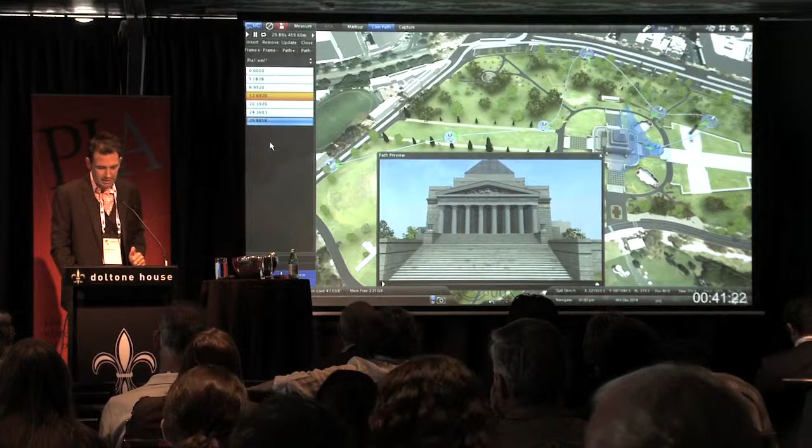We're really about trying to improve efficiency, okay? And we're about improving the outcomes and effectiveness. The effectiveness of you guys who are in the built environment who need to get to the negotiating table. I find the negotiating table is the place to be effective, yeah? You want to be there when people are having discussions.

So my view, I'm going to put forward that planners, and the reason I went to be a planner is because you're both visionaries, setting up the skeletal framework of the future, and you're also the facilitators and the mediators and the arbitrators between all the elements, right? And there's the physical, there's the functional, there's the interpersonal, and the stakeholder roles. You guys and me have the opportunity to sit there in the space between the spaces.

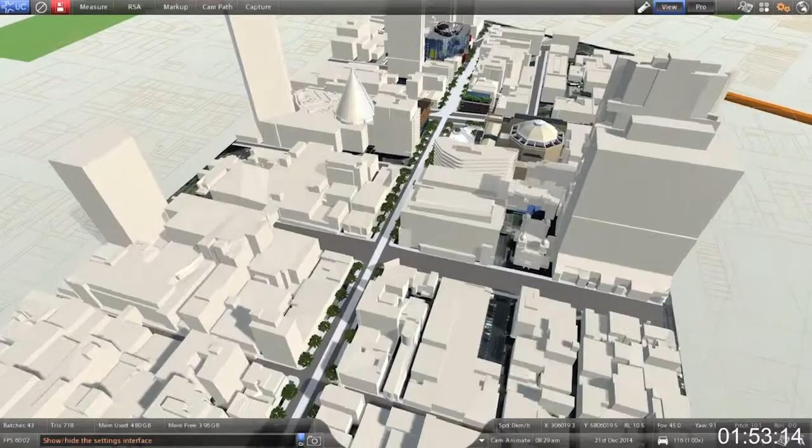Yeah, we've got engineers, we've got architects, they've all got their very specialist technical areas, but then there's how these things join up. It's how the vertical meets the horizontal, for example. It's how a road hits a terrain. It's how a train station hits the tram station or the bus station or the street. That space there is where the magic can happen. And it's a nice space for us to be able to grab and play with and run with and have a big influence and effect.

Now planners, in the nice way, have typically the tools of the zone and the code and the regulation, right? We need tools, and the reason I've gone out now and spent 10 years and bet the family farm is I needed a tool that allowed me to get down to the human scale, as you saw there. So this is just a video. You can actually see our toolbar around the edge of some of the work we've done in Melbourne.

These particular bits were actually paid for by the Melbourne Metro, and we're working between the Metro, the state planning agency, big road projects, and they're all using the same tool to talk to each other, and it is having a big transformative effect. So this tool, we need it to be integrated, we need it to be multidisciplinary, right? We need the engineers and the architects and the urban designers and the landscape architects talking to each other.

It needs to be agile, and it needs to be live. Okay, and the magic number here is on the bottom left, it says 60 FPS. So that's twice the rate that your TV runs at. So it's frames per second. So it can drive at the speed of conversation. You guys can have a conversation, and I'm going to reveal some tools today in this space. It needs to be intelligent and it needs to be measurable.

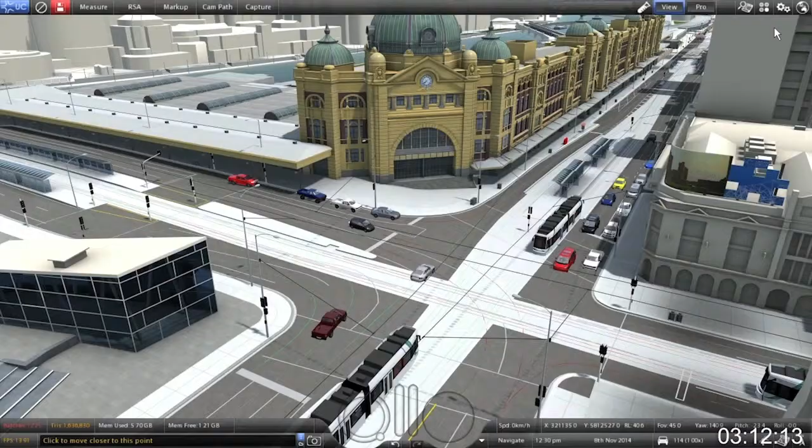Okay, so look, I'm a public space advocate, right? That's what I really love. And the thing that affects public space more than anything is transport. The transport guys, they've got all the money, they've got the big influence, they do the big projects. So I need to get to the table with the transport guys. So we've built tools here, and here we are dealing around Flinders Street Station. It just happens to be an intersection that we had.

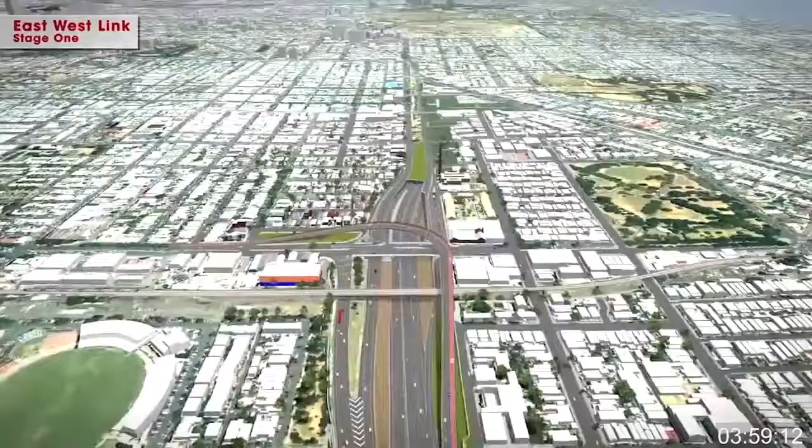That get you in and experience and influence that space live and in real time. And this one trick of I'm clicking on a car here and I'm now inside some sort of accurate engineering space, and I can click on the rear view mirror, which is important from a driver tester point of view, and particularly as the user experience from the steering wheel, and it would be great if it was push bikes. We do push bikes as well, you'll see in a minute, is really transforming projects just like this. This is a $10 billion road project on the edge of Melbourne.

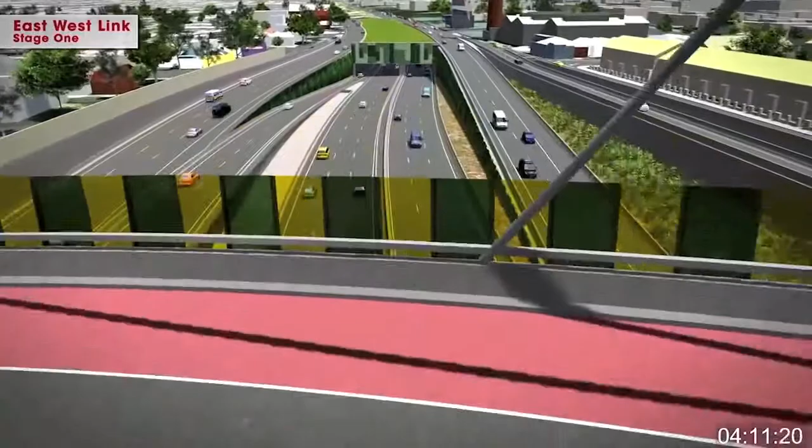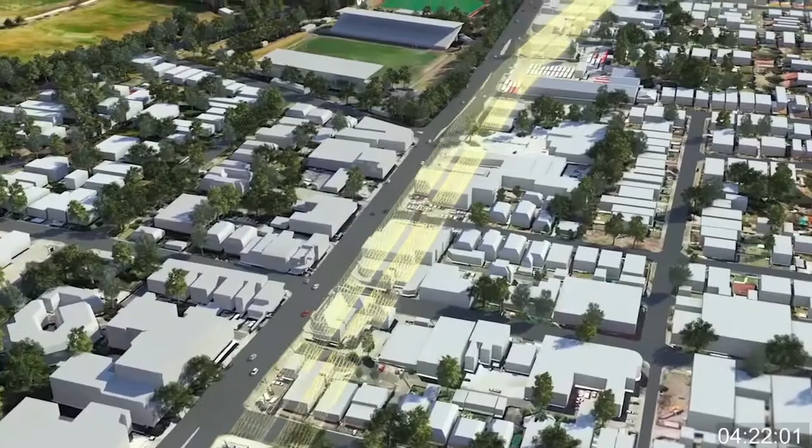And what we've been able to do is bring together all these elements, whether you believe in the project or not. It's about how it interfaces with the edges, yeah? It's how it integrates with the community. Can it benefit? Can it actually drive quality like CityLink and things like that with the fantastic landmarks? They do roads very well.

Sometimes people like to take it to this pre-rendered space. So this is East West Link, and we're sort of doing Disney, Pixar kind of tricks here and visual effects and tunnels underground and stuff like that, sort of into the promotional land. We don't do too much in the promotional kind of space, but here we are trying to sell the idea and tell the story really of, this tunnel sort of down there, so don't worry. And here's the urban renewal. But the space that we really made a big effect there was actually in demonstrating some of the earlier options and perhaps how they weren't the best thing for the actual community.

A lot of work we do is quite humble, it's quite underwhelming, it's quite sort of minimalist. So here's a bike path, actually next to the Foxground to Berry bypass, which is down south in New South Wales. Stage 1, 400 submissions and a bit of an agitated kind of community and a bit of negative media, and things didn't quite work out.

Stage 2, using the interactive media, of which this is just a video out of it, all built in virtual space. We also picked up a whole lot of traffic engineering problems, but really it was around, hey, we've got this really nice escarpment here. We want to see this escarpment, which you can see coming around the left. We haven't really resolved all the design yet. That's okay. We can go in and we can be in your front yard and we can have that conversation. They got 4 submissions. And those submissions were intelligent, informed, useful submissions as compared to people reading engineering plans and getting it off track. So that's number 1, being able to keep up with the conversation and build that stuff.

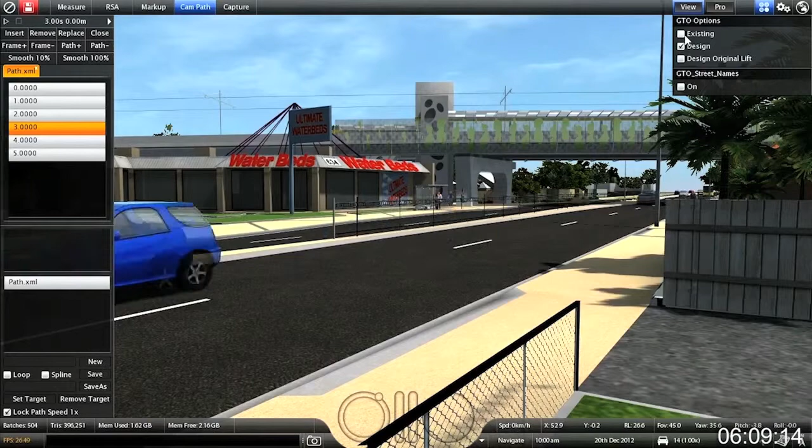Number 2 is optioneering. So we've done this for about $50 billion worth of infrastructure now, simply being able to go anywhere in space and flick between options. Here it is before, here it is after, and that grade separation. Here it is bridge 1, bridge 2, bridge 3. Here it is, you live here and you're about to have this thing come closer to your house. How do we have that conversation to improve that design outcome? So the interface there around the design aspect and bringing the community, the stakeholders.

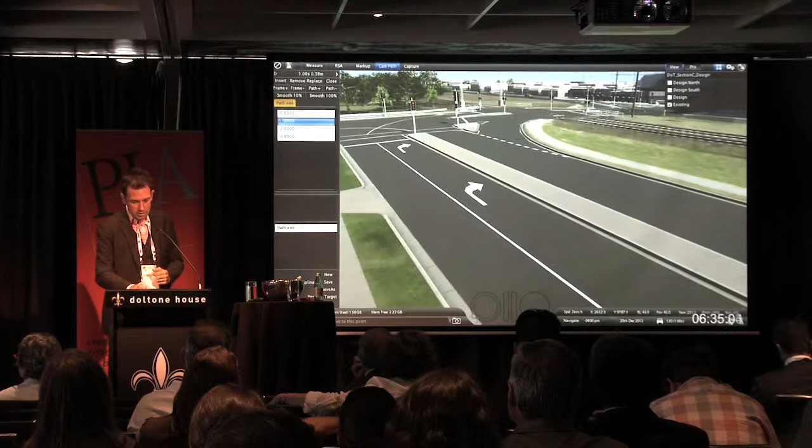Here's another one in Melbourne for regional rail link. And with the realness and the site rawness, it's honest, it's measurable. If you ever doubt it, you can go in and check out your relative levels and you can measure things. And that really allows the conversation to propel forward inside this transport space.

This is from South Australia. This is the Superway, which our claim to fame here was to be able to get this concept, which has sat for 2 or 3 years in engineering land spending millions and millions of dollars, build up the concept, and people were really worried about an 11-metre structure over their properties, and fair enough. And we could get that $800 million funded from Infrastructure Australia and then allow the conversation to occur and come up with the best solution possible.

But that's still not enough for me, okay? And working with people like Adrian, and Adrian in particular, into our next stage, we want to be faster and we want to be further at the front of the conversation, okay? So here we are taking engineering drawings and architectural drawings and putting them in place. Now what we want to do here is we've got to have this base model.

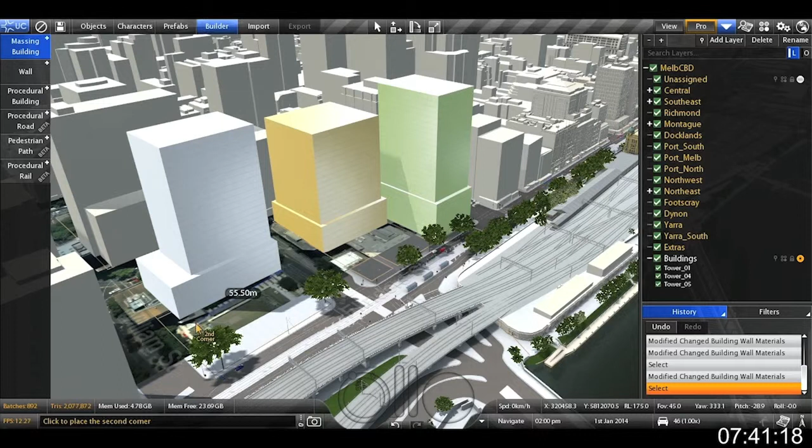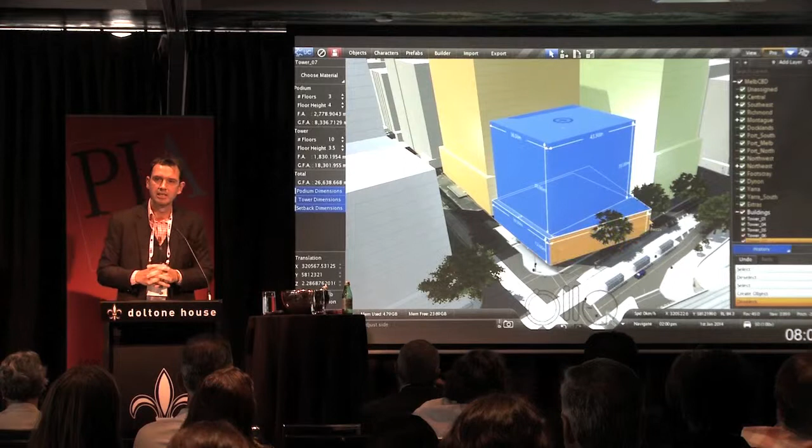So here's Melbourne, sort of patched together from a few places, and we want to be able to have a conversation about a podium and tower in this particular case. On the left of the screen it's got the floor area, the floor-to-floor heights, the setback, and you can literally sit there and have that conversation - I'll do one here in 15 seconds, but it could be 5 minutes, half an hour, an hour - really analyse what you can do here, what you should do, and its impacts on the space around you.

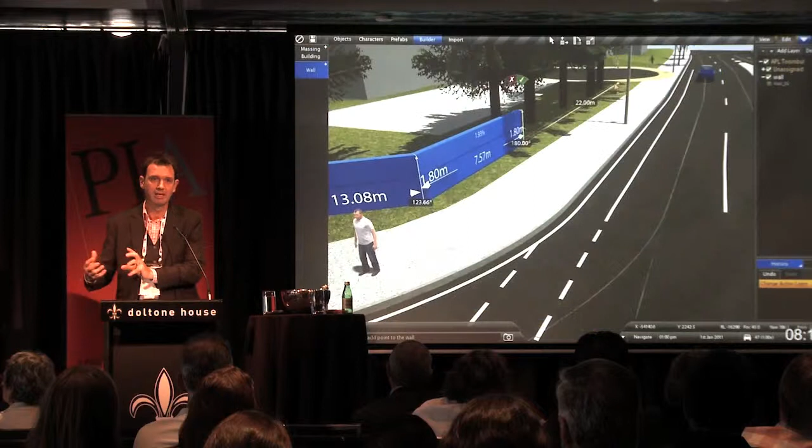This perhaps could have been months and months of conversation, with all these pretty architectural drawings, and now you're literally sitting there saying, well, do we just like this form and does it work? Same with walls - we do that in sort of constrained environments around railway lines and things.

Into a more complex building form now. I went into planning to be able to sculpt space at this kind of level - big boxes, shapes - but then get down to the human scale and be the woman or the child or the man in the street experiencing this kind of space.

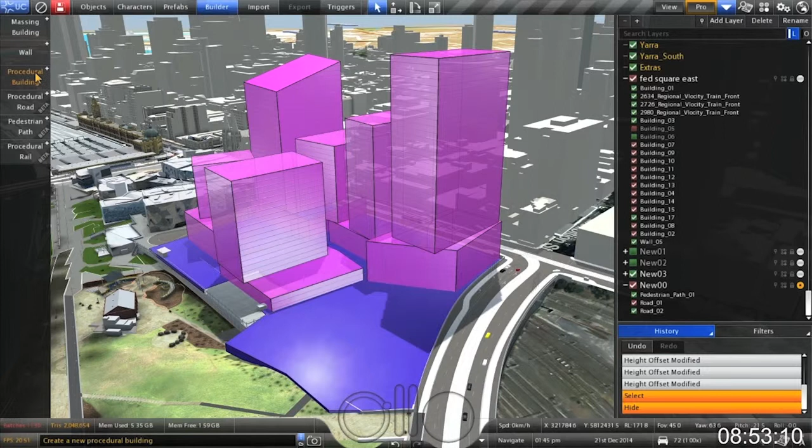So this is Fed Square East. This is not a proposal, by the way - I'm just absolutely messing around there at Fed Square East, so don't get the wrong idea. Confidentiality, of course, is all very important in this space.

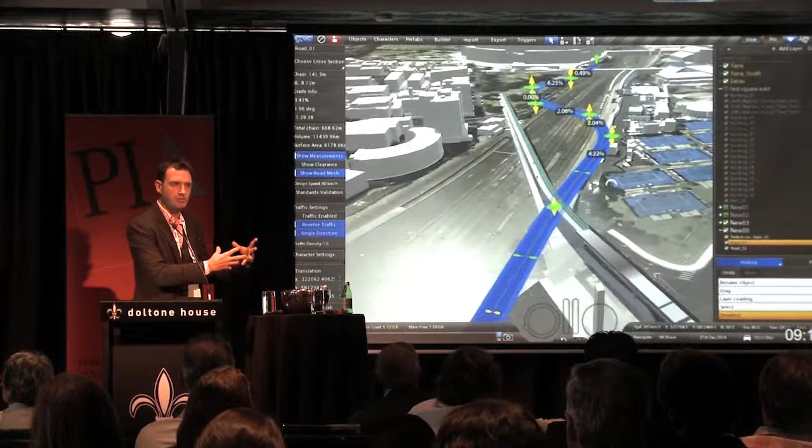So now we wanted to influence the engineers too. Planners are great people, engineers are great people too, but we want to get into that space where these alignments have these massive effects on our urban form, like a road alignment. We don't do like that railway line we saw in Tokyo, sadly, where we tend to grade separate everything and have big safety zones and big fences around things.

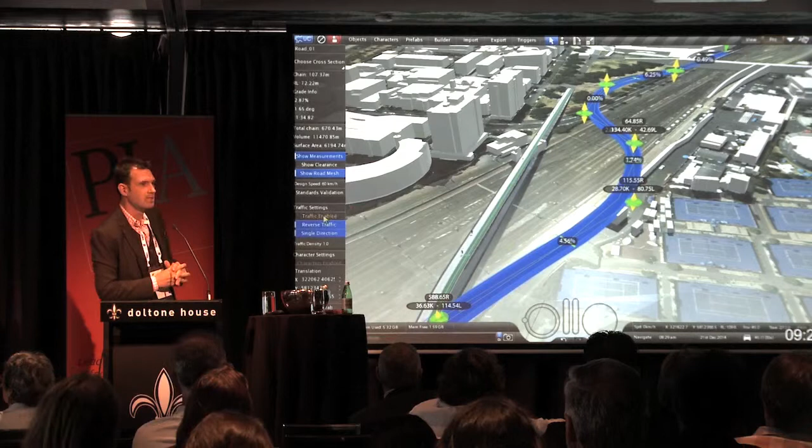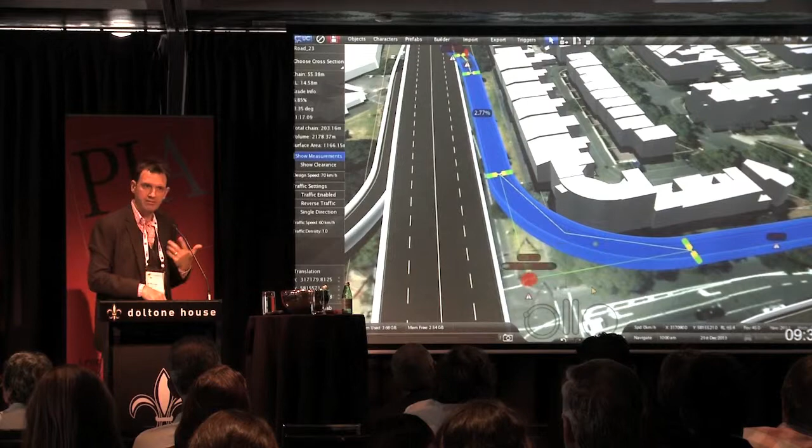So we've gone in and actually analysed the national standards in road design, called Austroads, and said, how do we allow people to make a road and test its compliance for vertical curve, horizontal curve, gradients, superelevation - there's a whole range of factors in there - sort of rubber band simple. We're talking about the technology of the future, super easy.

This is exactly what we're doing here. Red basically means bad, as per usual - red is a non-compliant space. And we're putting this tool inside the conversation that is happening between stakeholders right up front.

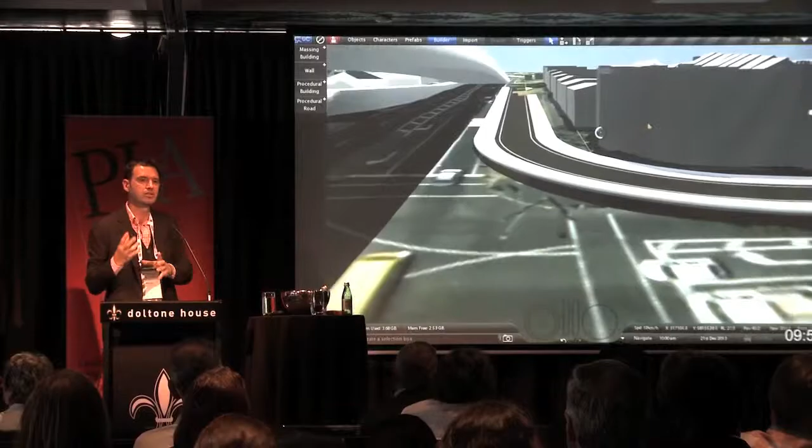Okay, so here we've got place A, where we've got the buildings more or less there with the aerial photography, and then we're going in and smashing that stuff in live in a meeting. That would have been years of conversation and millions of dollars.

Now I'm messing around here. I'm also building a railway line through somewhere in Melbourne, which will remain unnamed, but it's really just to prove that again we can get a light rail concept up and happening in a matter of seconds, a matter of minutes.

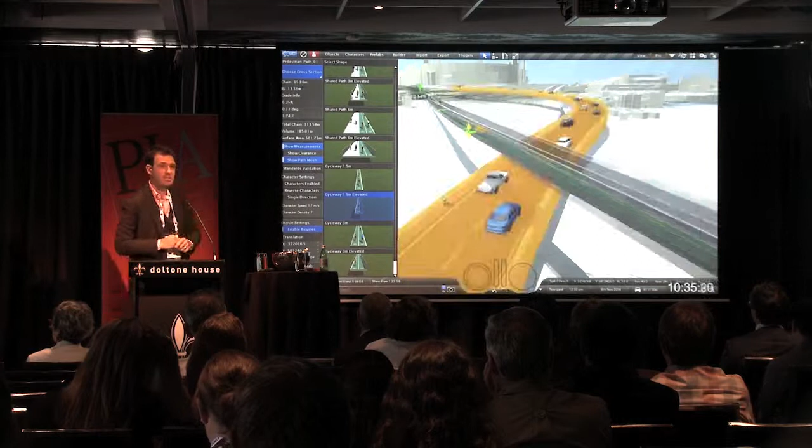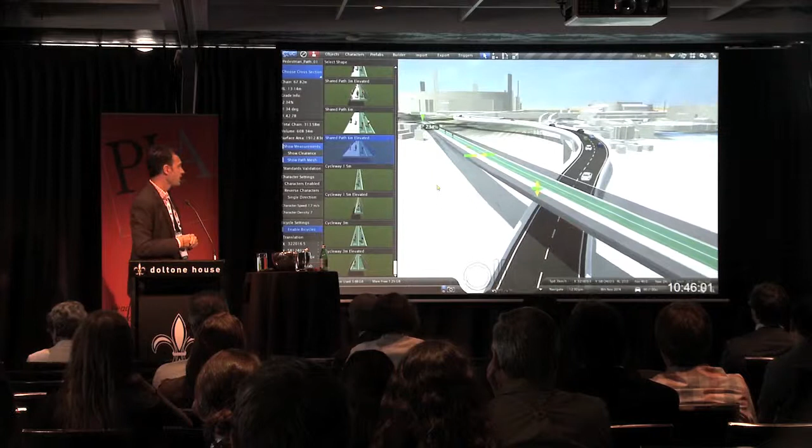Same here, same idea, using these Austroads standards into paths, so you can select different sections - push bikes, pedestrians, all that kind of stuff. Bring that conversation to the front, and of course it's circular, as all design is.

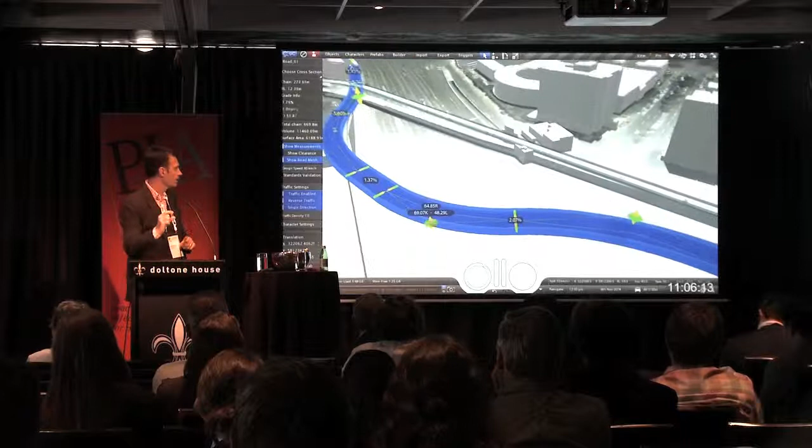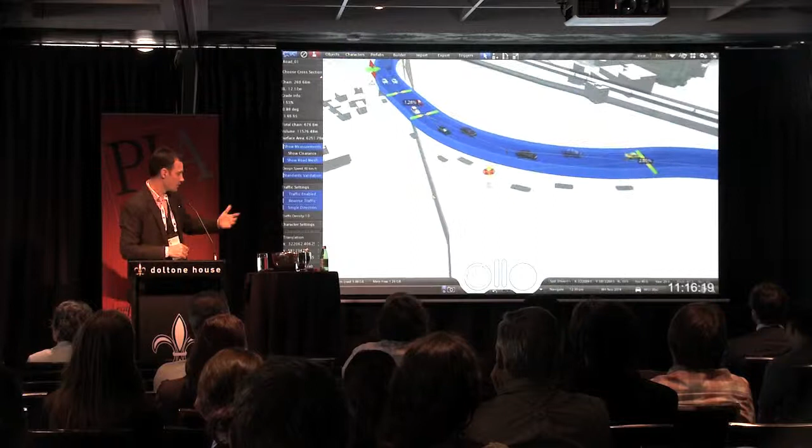It goes back to everything has to be verified by the technical experts, of course, but getting you down there in that push bike space, for example here - and they are commuter type push bikes, sorry there Bob, in their Lycra - it gets you the idea of what is this place actually like as a human being, on the fly. I'll select this road and it will tell me a few things that are wrong with it - in this particular case I've got the horizontal radius error at the design speed. In the engineering space, design speed tends to drive the functionality.

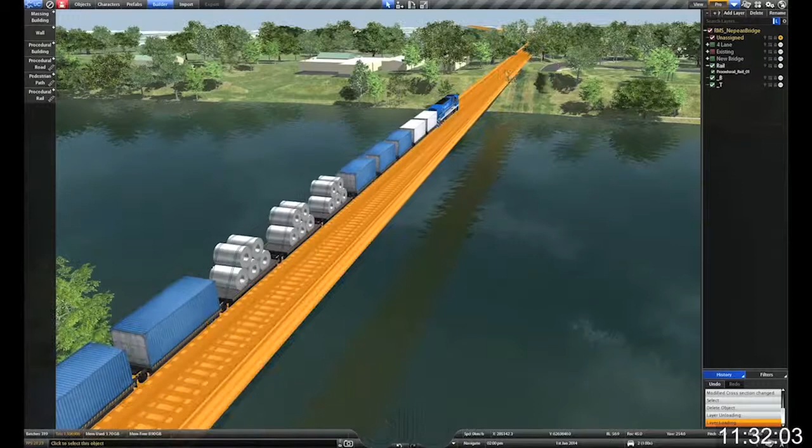So a lot of our clients are getting it, and you'll see Adrian presenting that up. Then in the transport space, which is mainly where we work, we're able to offer - and once people go through this process once or twice with clients - they're like, wow, this is really changing the conversation here, this is really mixing up the situation.

So we're now looking at - you guys probably know the charrette and the inquiry by design process and stuff like that. It's good, but it can be kind of expensive, and you come out with all these 2D drawings.

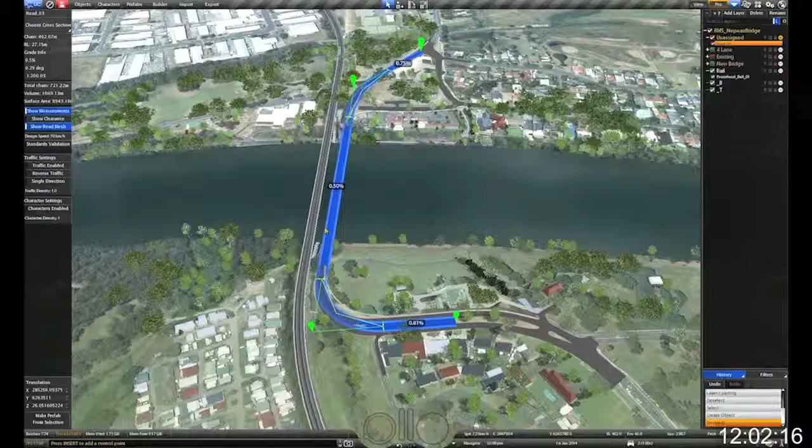So again, we're literally going into a situation where we've got bridge A. Can we sit down before we do the technical expert stuff and actually build out a concept that we're kind of happy with? Maybe it's got sensitivities around landscape and townscape and heritage and things like that, and have that conversation before we all go down and worry about nuts and bolts, reinforcement, structural engineering and all that kind of stuff.

Both things need to interplay, but this is the transformative effect that's happening now on more and more projects by making this technology super easy, I guess.

Collaboration is really the key to this, and it's shared thinking, being able to have that shared thinking process. I'm a bit shocked myself. I'm now dealing with very large engineering houses who love it. They're like, wow, this is fantastic, we can literally sit there and build this stuff on the fly. They used to think, oh, we're going to do 3 options, it's going to be amazing. A big one, we'll do 200 options in a week now. We just plough through it and play and move things around in that space.

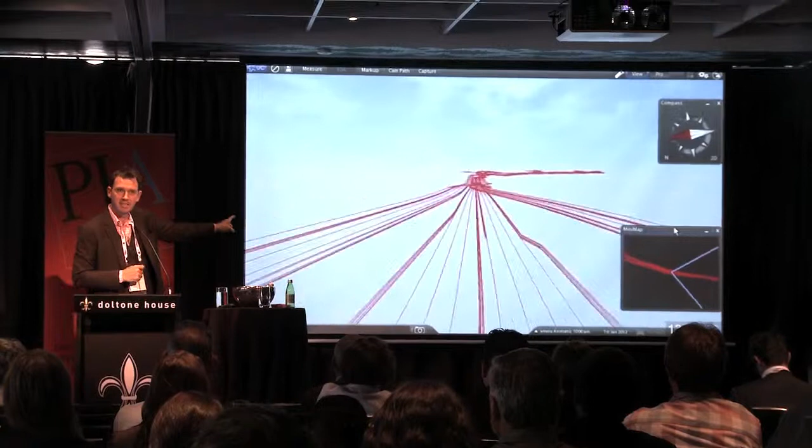But there's still a problem, and this is the problem, right? Data is expensive, man, you've got to buy this stuff. And I tell you, planners don't have a lot of money. Getting the road engineers to these splines, these cost $10 million to make. And then they threw them away. They weren't good, they got rid of them. That is the kind of problem we're dealing with here.

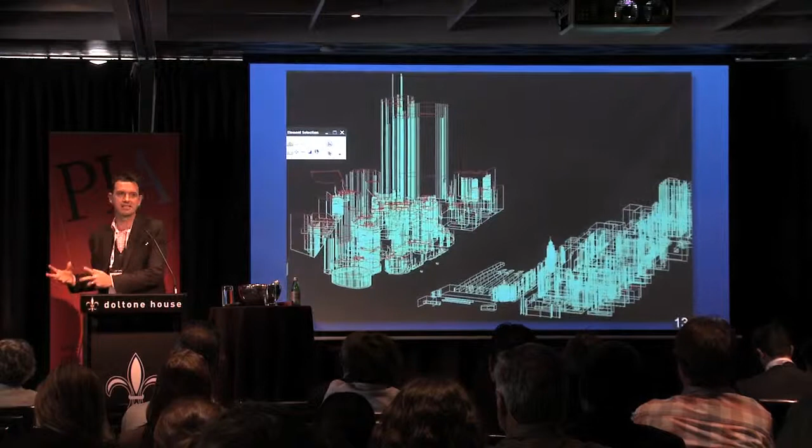So we've spent the last year working out how do we get this stuff into people more. So rather than the $1 million setup, how can we have tens of thousands of dollars of getting accurate, credible data?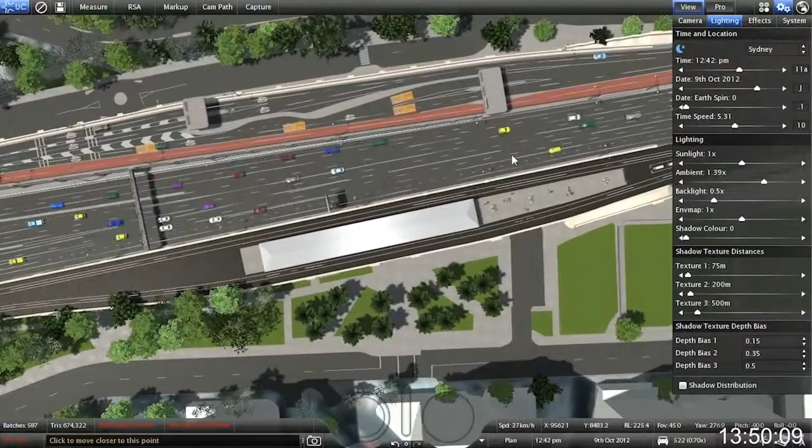For example, we built the Sydney Harbour Bridge, you can all see it from here. As an asset management tool, it sits now with the road engineers, and they use it directly for testing quite detailed stuff, like they put in these new gantries, and there was lots of road safety auditing and lots of conversations. You can imagine everyone's interested in what's happening at the Southern Toll Plaza, and here it's fairly important, trying to get those things right. I'm trying to influence them to say, hey, this is how we can do it.

Where am I up to? About here. All right.

So what we've done now is we've gone and found this new technology. It's now running through Google Earth and Apple Maps, and it's called photogrammetry. Well, photogrammetry is kind of old, but there's this new aerial photogrammetry. And the blobby sort of apocalyptic post-Terminator 2 type world you see here, I've got the hand-modelled version of Flinders Street Station, which is nice and clean and costs a bit of money to build. And I've got this approximate version, which is actually automatically generated from a helicopter flying above and taking 10,000 images on high-res photography, but it's just photographs. And we all know photos are kind of cheap, right?

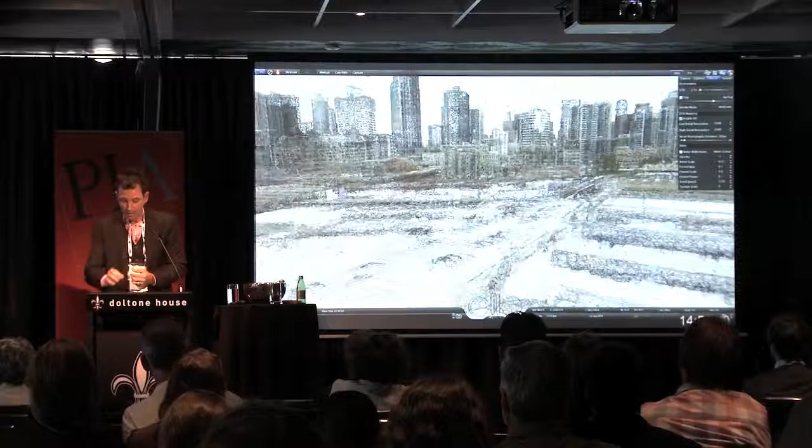And then it runs through an algorithm which is built in France. And what we now have is the whole of Melbourne in this particular case. We've got lots of other places. We've actually got Curtin University here, you'll be happy to know, I'm going to show you that in a second. This would have been $2, $3, $4 million to build this city to 300 or 400 mils, down to 20 mils if you get fancy. It can now be done for $50,000, $60,000 automatically in a month, right?

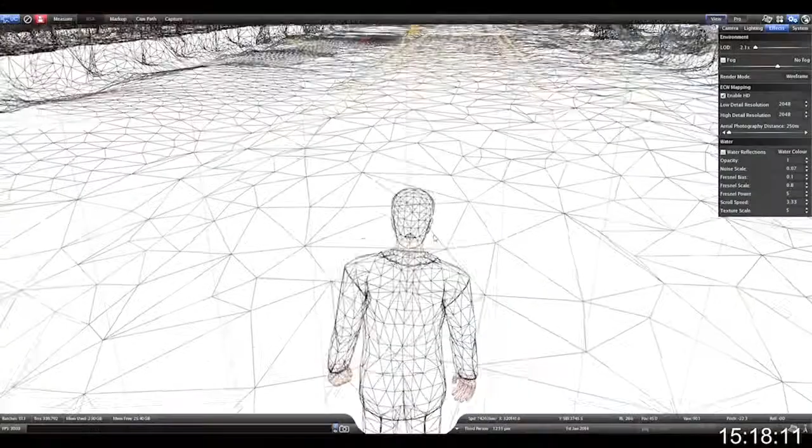But that's all very good, but then you've got to run it. And you guys have probably used 3D technology before, it's kind of clunky, it's kind of slow, it's kind of chunky. You sort of don't really want to take it to the boardroom or sit with the minister or the councillors. And what the geeks, the online communities say, you'll never be able to drive a car in this space. This is 35 gigs of data and about 300 million polygons here.

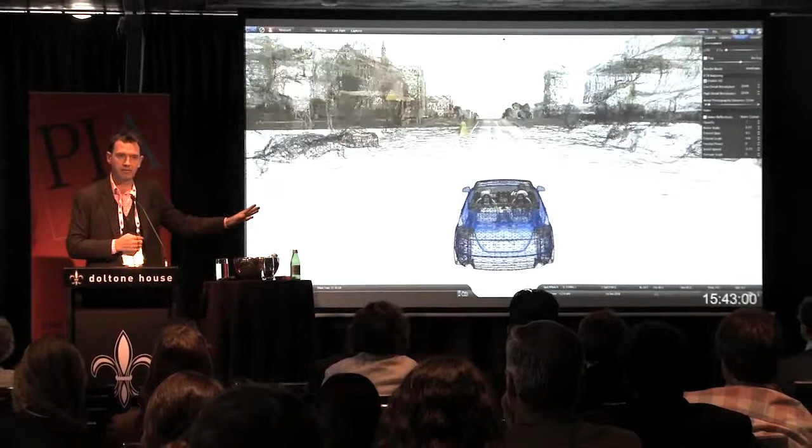And what we've done is invested in, okay, how do we make this stuff run fast? So I've got it running at what's locked on at 30 frames a second here, and I'm now driving through an automatically generated 50 mil accurate city, okay, and I can have that to you in probably 4 weeks, any city, anywhere in the world, running there in real time, and you can do this kind of stuff, catching trains. This is raw as well, so it's all very blobby, this area, and the technology is getting better and better all the time.

And here's Curtin University, for example, as another area. Now, what I love about this is I get every single tree, every single building, every single line marking, every single piece of curb and channel automatically created, and then I can put you as the client inside that space, and then you can start playing. We don't act as the designer, we act as the mediator and the facilitator between all these different experts to come up with the right result.

Now, we're all human. We know good when we see it, and we know bad when we see it. Even engineers are human, right? They see it, and they know, and they're like, oh geez, that was, maybe not, let's tweak it, which is great. It's exactly the result you want out of these situations.

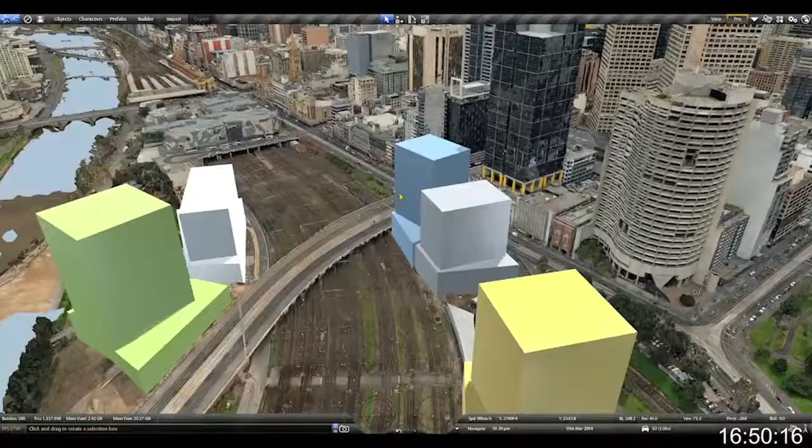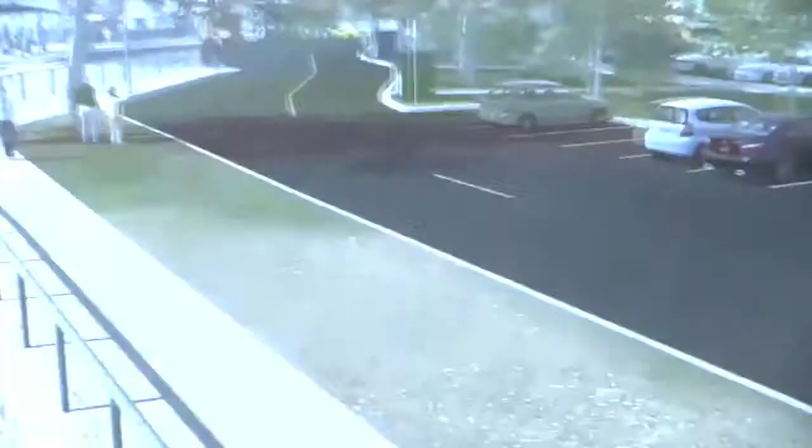So where we're going next, this stuff runs across your network. You can actually sit it inside the IT department—always a tough conversation with the IT guys—and push it out through the entire organisation on fairly average computers. This is happening across lots of projects now, and we're trying to find the opportunity to get the data into your hands a lot cheaper, a lot simpler, so you can start playing with this space right away.

So I'm now going to introduce Adrian Salmon. I've been working with Adrian for a few years, and he's been doing this kind of work in the development assessment space at the state government level in Melbourne, and done several hundred buildings this way. Thank you very much.

Thank you very much, Ben. I don't even know where I stumbled across Ben, but we had a situation where developers kept asking for more and more on very small sites. We were trying to play with setbacks and a lot of things. We have a minister in Victoria, Matthew Guy, who when elected in 2010 came with a very clear agenda of development and economic development through construction, especially in the CBD.

I look after, quite luckily, a core area of the CBD—anything above 25,000 square metres in floor area comes to the state government for assessment. We were struggling with getting time; as always in government, there seemed to be less staff. I actually started a team with 14, now I work with a team of 5 plus 3 students, and we're still pushing more work through.

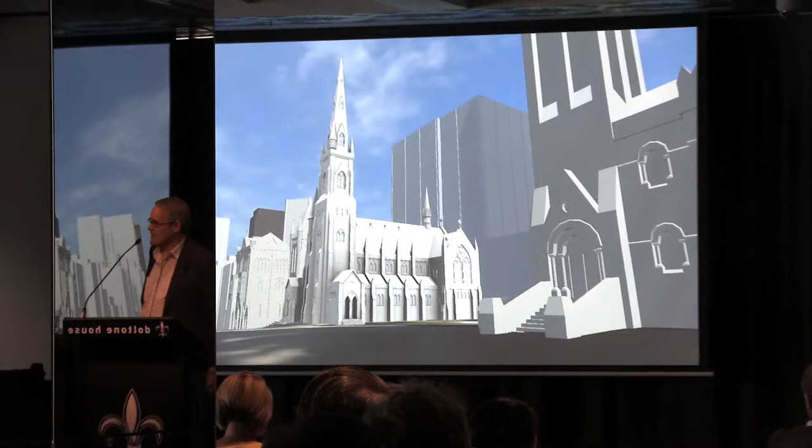What we did was, when we had people we were trying to force to make different decisions about their developments—because so much works on the basis of how much economic yield you're going to get out of it, and we also have those wonderful single bedroom apartments—this was a development we had to actually sell, because we had to pay Ben for some of the work he did. We had a new secretary appointed, Andrew Tongue, a man with great vision, and we gave him Scots' Church, which he approved, and we assessed it by going through different areas of the development and showing different boundaries.

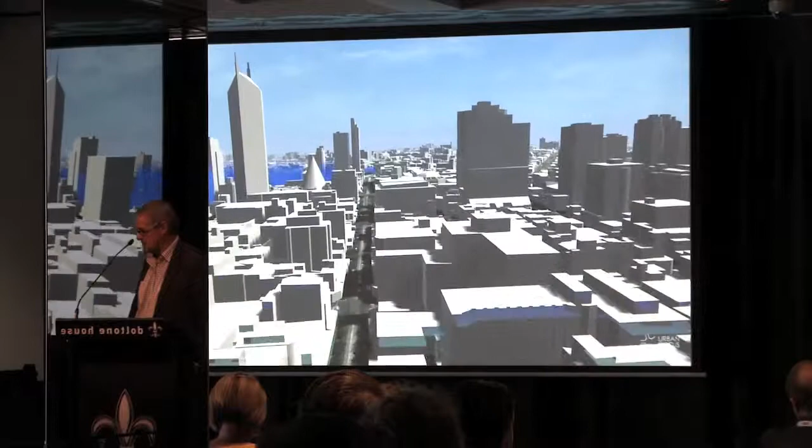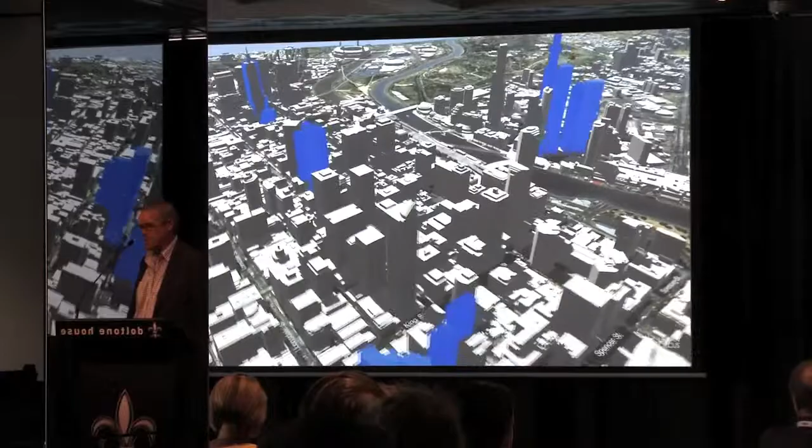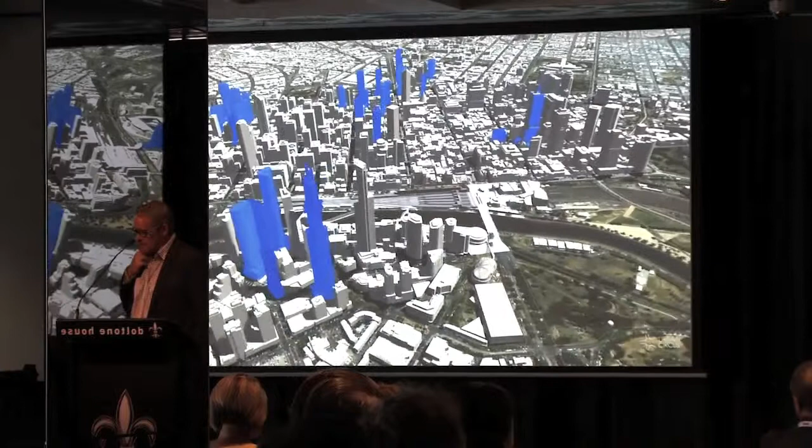Here we're showing what actually happens in the CBD if we turn on all of the development which has been approved. The Minister for Planning has approved about $12 billion worth of development since November 2010 in Melbourne, and around 50 to 60% of that is actually under construction—the first time we've really been able to track that. These are some of the big buildings; you can see Australia 108, which will be one of the taller buildings.

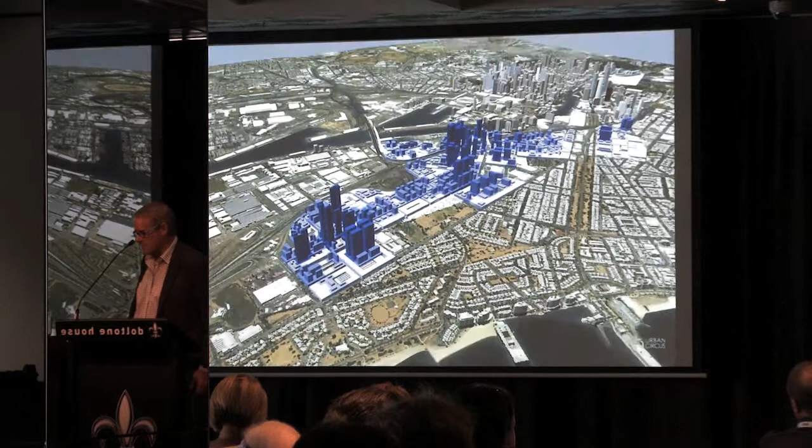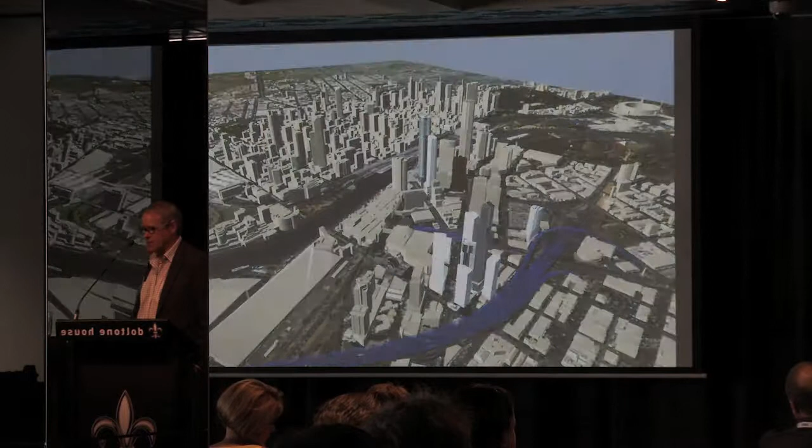Then we went down and started on 240 hectares of Fisherman's Bend, located in an industrial, quite viable area southwest of Melbourne. We worked out the yields there and built it up to see how much you could actually achieve. We then moved into working very closely with Southbank, which is quite often criticised as being a bit soulless, so we worked through what you could do in yields and densities.

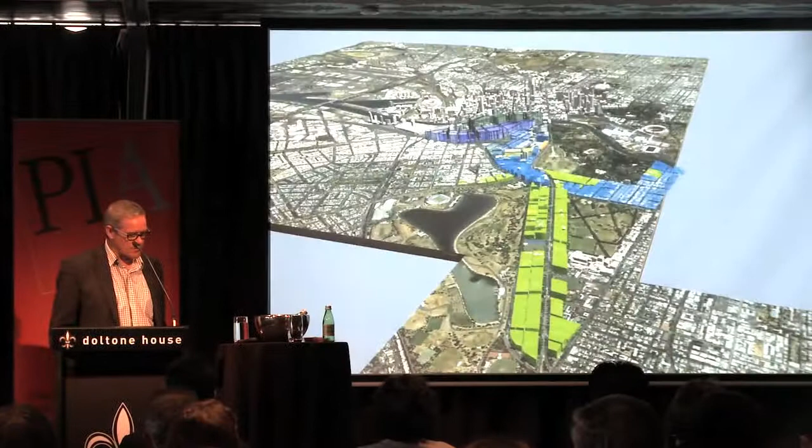We then started putting projects we wanted to approve into the model. This shows people what the different height controls would be if you blocked it all in and everything happened. Now, we know it doesn't happen that way, but this can be quite worrying for people, because you actually see what the city's going to be like in maybe 40, 50, or 100 years.

One project which we put through was a very large tower for a developer in Queensbridge Street called Queensbridge Tower. Bates Smart was the architects, and this video which you're watching was actually included on Channel 9 and I think Channel 10 News. It actually came straight out of Ben's program, out of the Urban Circus. So we were actually able to use it in very different ways of explaining things to people.

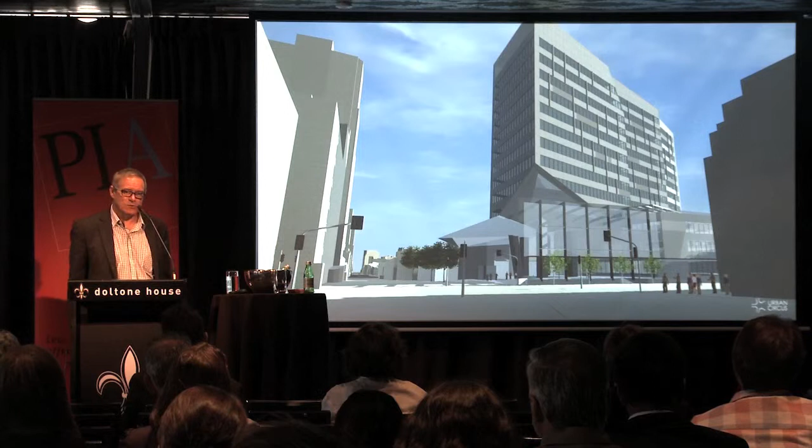This was an interesting challenge. It was a new police station to be built in the CBD of Melbourne. It's up by Docklands, butts onto a railway line, and everything around it's very low. And we also have directly opposite the Remand Centre, and people in remand actually do have quite a number of rights. So we had to actually build a police station, which is an operational police station, and then has all of the people in the building, which are police backup people, and it was actually delivered with it. And that's being constructed at the moment.

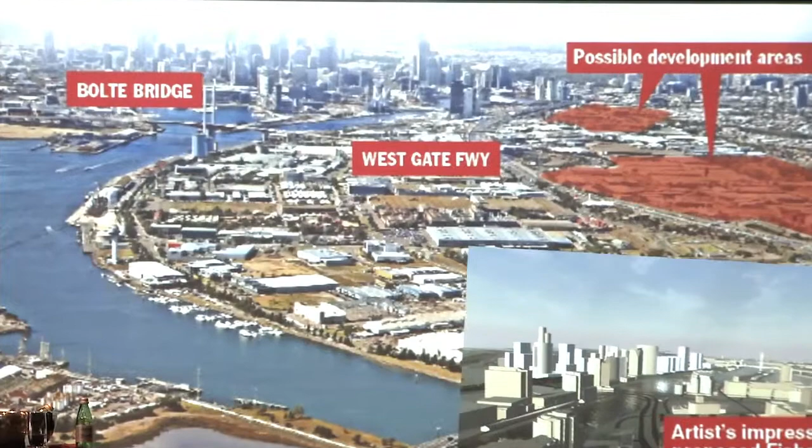This was the Fisherman's Bend vision. Initially we started doing just little dots, and it was an idea. And then we actually started putting in the buildings so that people could get an idea about what it was going to be. I think we might have been a bit problematic in that, because the actual response which one of the councils gave us was 4 and 8 stories was suitable. So we're struggling with that at the moment, and it's now with the Metropolitan Planning Authority.

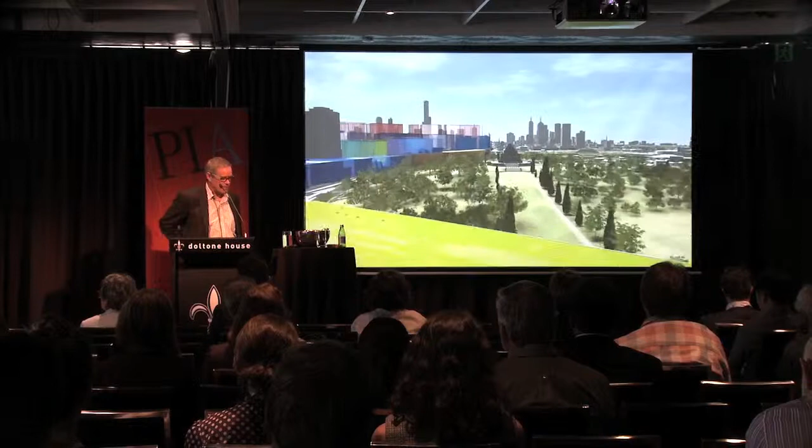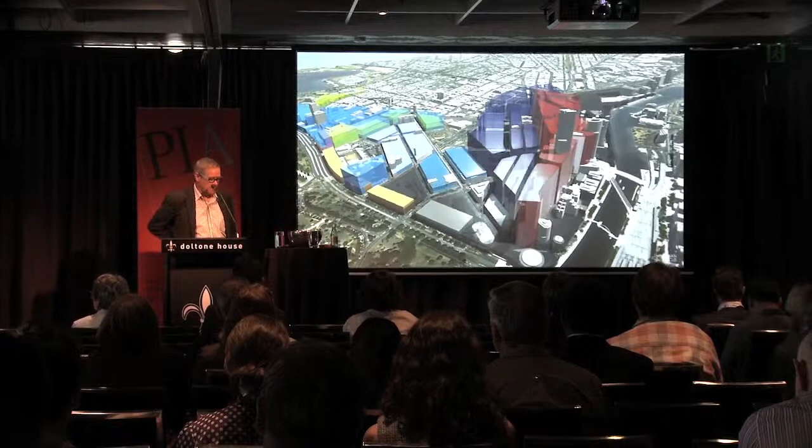This is the Shrine of Remembrance. It's only one of 2 in the world, and very important. It's 100 years old this year. And we were addressing both that control and the Southbank controls to see what it would do. So with Ben's program, we were able to block up what the yields would be, and then one of the other consultants pulled it all together and is introducing, probably within the next 3 to 4 weeks, new controls along the shrine. So it's a very interesting tool which we've grabbed from Ben to save a lot of time, which was extremely important for us.

Because if we didn't do that, I would still probably be today about 300 or 400% behind where I would have been, especially with the reduction in resources and things like that. So it's been a fantastic outcome for everybody. The Minister for Planning in Melbourne loves it, the Minister for Transport loves it, and you have seen some of Ben's work in both built form stuff as well as the infrastructure type of area. So thank you very much.

Adrian. So thank you. That's about it from us. I haven't heard the glass go ding, ding, ding, but we probably do have some time for some conversations.

I just want to drive home what we're really trying to get to the profession, all professions in the built environment: the tools and the capabilities to be able to have the conversations earlier and earlier around the situations. Now, Adrian and the department, I thought it was DTPLI, but it's been rebranded. Every week it's being rebranded. We did a talk at the 6th International Urban Design Conference, and Tanya Krasafi wrote a paper. I've got about 6 copies of that paper here. Apparently around 200 development assessments have now gone through this process of using this virtual model, having those conversations with the Minister and all the stakeholders.